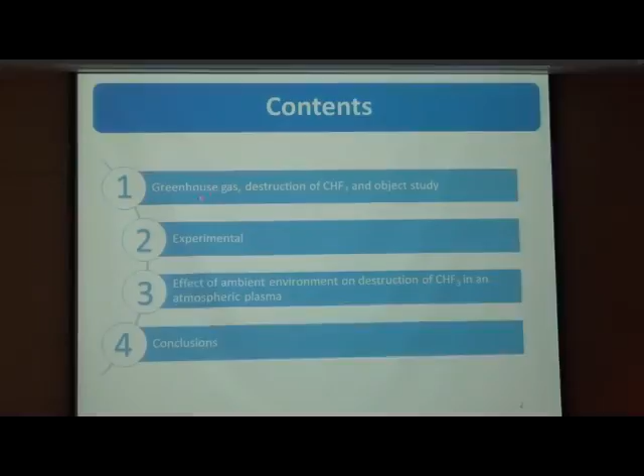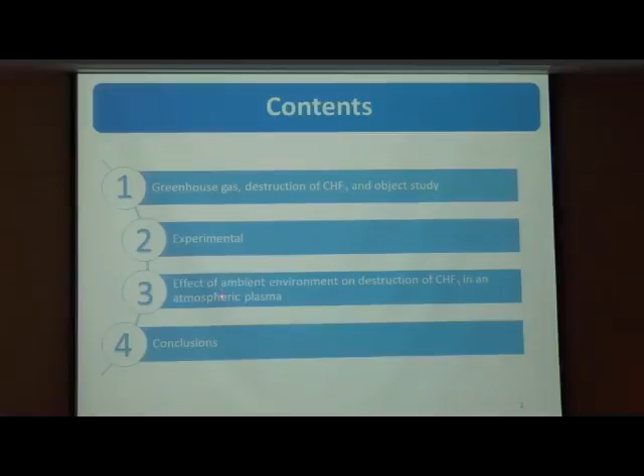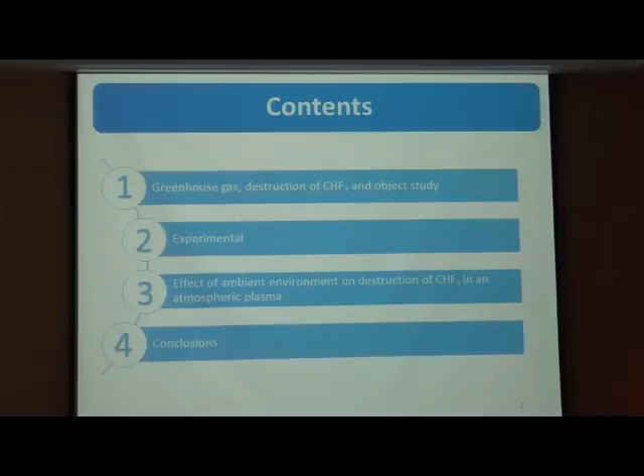PhD candidate at Nguyen National University. Today I am very happy to be here and tell you some interesting data about destruction of CHF3 in an atmospheric plasma system. I would like to cover several sections: first, introduction of greenhouse gas and destruction of CHF3 and the objects of my study; second, I will show the experiment; then I will focus on the effect of ambient environment on the destruction of CHF3 in an atmospheric plasma system; and at the end I will show some conclusions.

Now I am going to session one. Here is a schematic of energy exchange between the sun and Earth's surface and atmosphere. When daylight comes, solar radiation can be absorbed by the surface of Earth and atmosphere, and then Earth's surface emits thermal radiation. In this case, a larger amount of thermal radiation from the surface can be absorbed by the atmosphere. After that, the atmosphere emits thermal infrared radiation back to the Earth's surface and into space.

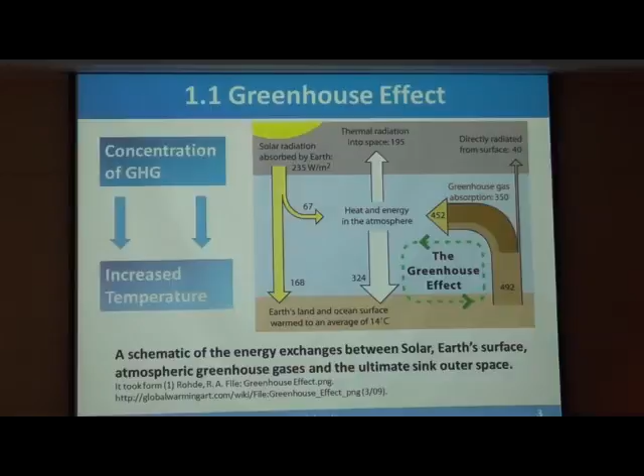Therefore, when the concentration of greenhouse gas increases, the temperature in the world increases. Greenhouse gas is generated from natural processes or human activity, for example decomposition of organic material or burning of fossil fuel, agriculture, and several industrial processes that generate greenhouse gas.

In this figure, the emission of carbon dioxide is increasing while forest area is decreasing, from 1994 to 2014. This presents us the increasing emission of greenhouse gas as a serious situation for the world.

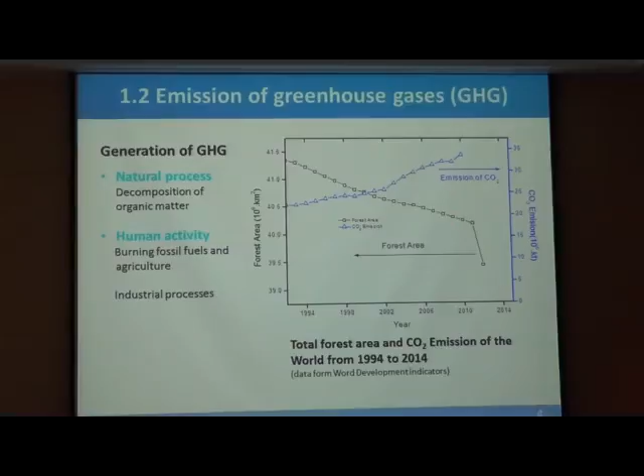This picture shows what kind of industry generates high greenhouse gas and what gas is generated in industry. Here you can see the energy industry contains about 60% of total greenhouse gas in the world, and carbon dioxide is the main greenhouse gas, containing about 80% of total greenhouse gas over the world.

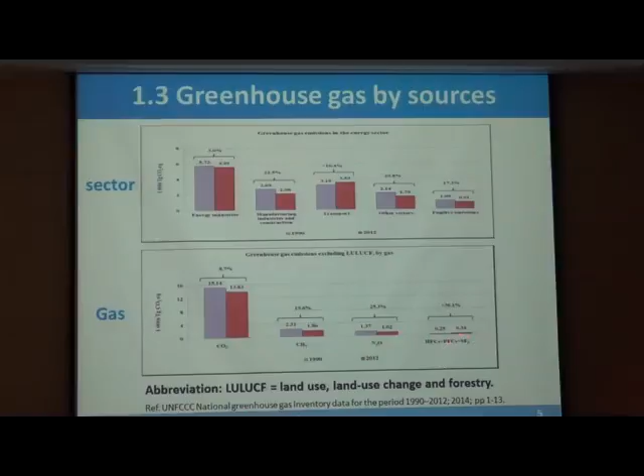Here you can see SF6 and PFC, with SF6 about 6%, but CHF3 is a product during manufacture of HCFC-22. Perfluorocarbon compounds contain about 6% of emission of total greenhouse gas, but global warming potential of CHF3 is higher than carbon dioxide by about 11,700 times, and the lifetime of CHF3 is about 260 years.

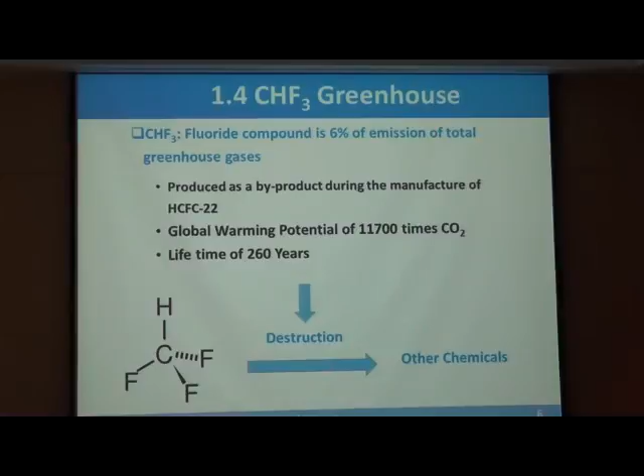So decomposition of CHF3 into other chemicals is very important and interesting for the reduction of greenhouse gas. Today we have thermal oxidation, catalyst methods, and plasma reaction for the decomposition of CHF3.

In thermal oxidation, the operation temperature is high, about 1200 Celsius, and this process requires further treatment of exhaust gas. For example, this process produces HF acid and HCl acid that must be treated. But in this thermal oxidation, there is higher destruction of CHF3.

For catalyst methods, the reaction temperature is lower, about 500 Celsius. But in these catalyst methods, HF acid forms and reacts with the catalyst, so that is the main problem of catalyst methods.

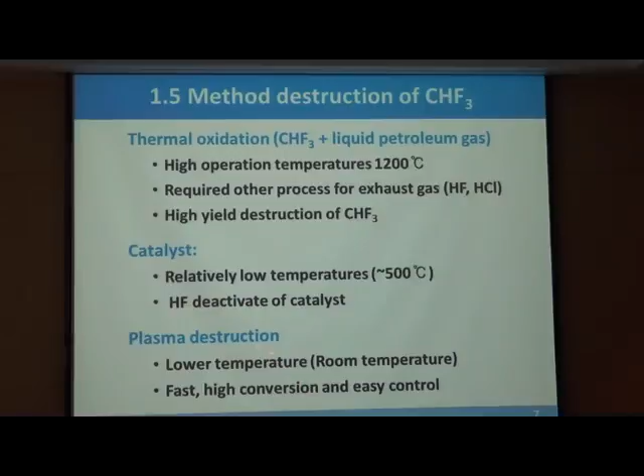Plasma destruction of CHF3 can be performed at low temperature, is fast, has high conversion, and is easy to control. Why can plasma destruction do this easily? Because the key to destruction of CHF3 by plasma is the electron impact reaction.

Here I show several main reactions of electrons with CHF3 in a plasma system. High energy electrons can be generated under an electrical field, which is the reason this can be performed at room temperature, faster, and with easier control of the process.

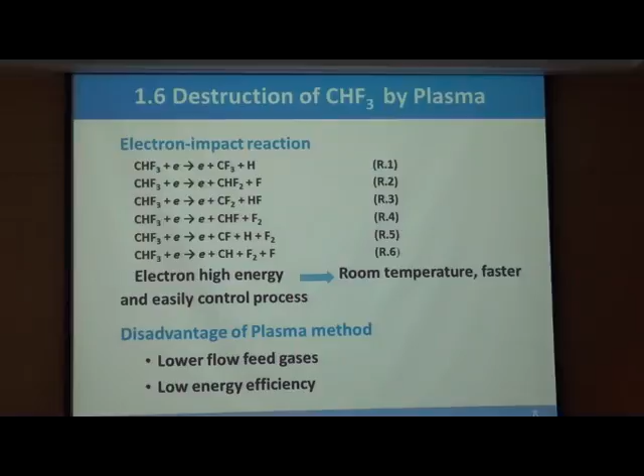However, in the plasma method, there is low flow gas and low energy efficiency. So in my study, I want to improve energy efficiency for reduction of CHF3.

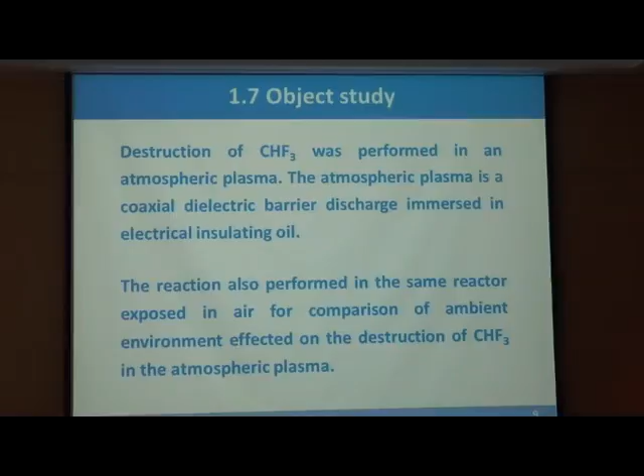Here is the object of my study: destruction of CHF3 performed in an atmospheric plasma. The plasma is a coaxial discharge immersed in electrical insulator oil. The reaction is also performed in the same reactor, but with the reactor exposed to air, for comparison of how the ambient environment affects the destruction of CHF3 in the atmospheric plasma.

Now I want to show what I did. Here is the mixed gas from CHF3, nitrogen, and oxygen, with the ratio of nitrogen to oxygen equal to 79 to 21, introduced into the discharge zone by MFC, a mass flow rate controller. For generation of the electrical field, I used an AP plasma power supply. To record the electric waveform, I used a digital oscilloscope, and for analysis of gas products I used a GC system.

For analysis of optical emission of the plasma, I used an OES system to record the optical emission spectroscopy. The reactor has a discharge gap of about 1 millimeter, and the discharge volume is equal to 10 milliliters.

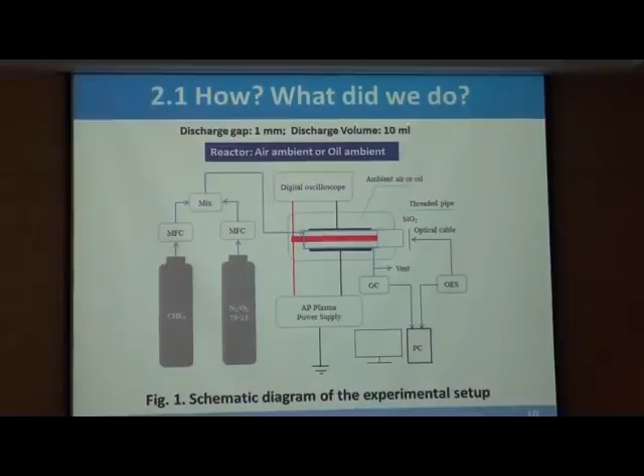To understand my work, you can see the schematic of my experiment. For destruction of CHF3, I perform two cases: the first reactor in air and the second reactor in oil.

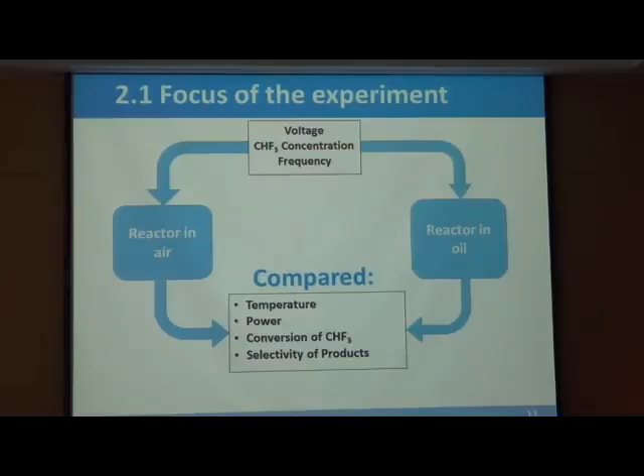Here you can see power and temperature linearly increasing with time of reaction and voltage. However, in this case, with applied voltage of 7 kV in air, this is non-linear because we have a peak at reaction time of 9 minutes.

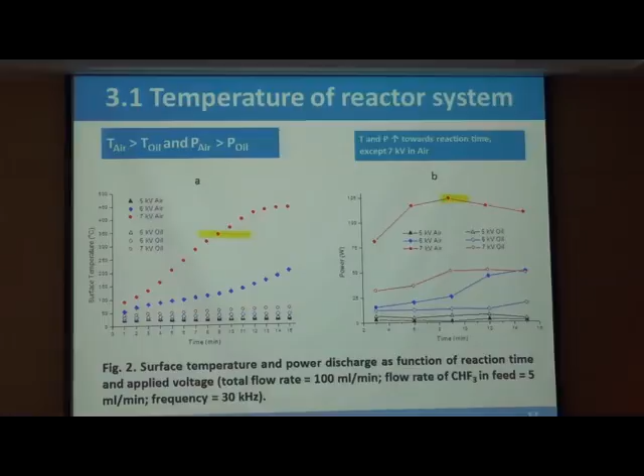And with temperature about 350 Celsius. Here's a question: why at 7 kV do we have a peak at 9 minutes? I would like you to attend to the next slide, which will show the reason for this.

Here in figure A, is a cross view of my reactor. Here I have three layers of dielectrics. The first is the gas gap layer, the second is the small oil or gap, and at the end is the dielectric barrier layer.

Because in the reactor it causes that the capacitance of each layer can be given by this function, and here you can see a layout of the circuit reactor in a series of capacitance. Here is the capacitance of the dielectric barrier,

and for the gap of oil or air, and for the discharge gap, and so that's a series, so the total capacitance can be generated by this function.

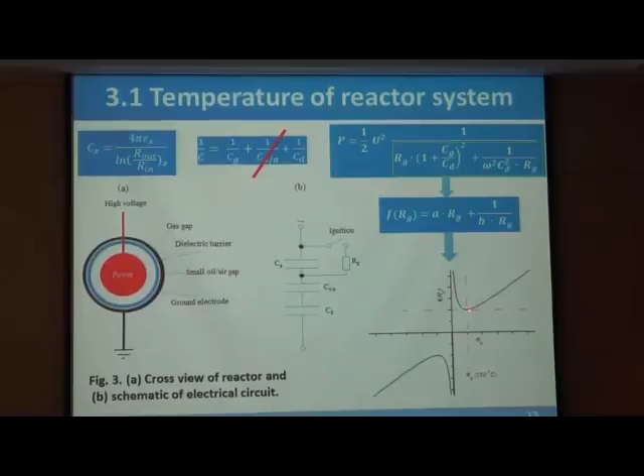according to our experiment, it may obtain a minimum at 350 Celsius. So that's Rg, meaning at this point, and then so the power obtains its highest value at Rg, about 350 Celsius.

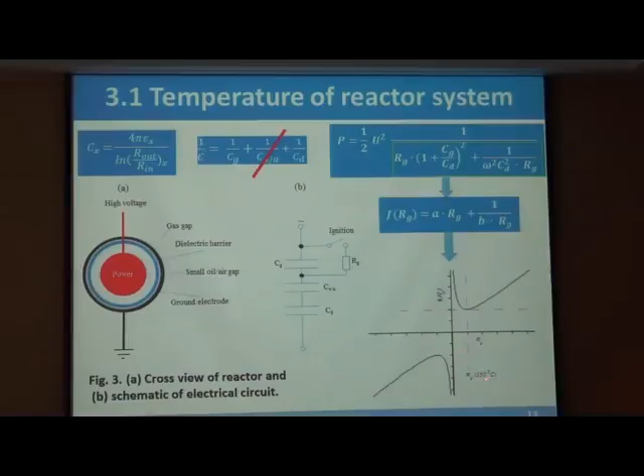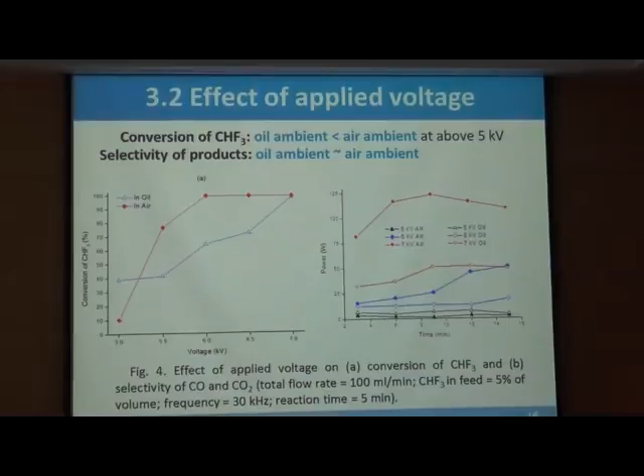However, in this case, when you see 7 kilovolts, the conversion of CHF3 under oil or air is about the same, near 100%, but power in the oil is lower than in the air, which shows that energy efficiency in the oil is higher than in the air.

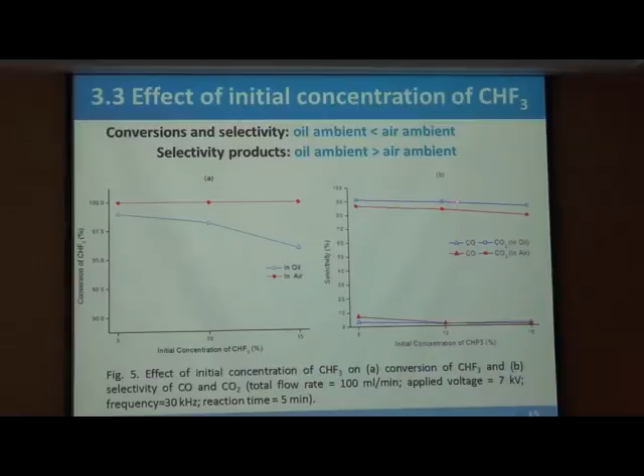For the same trend of CO and carbon dioxide, however, in this case, selectivity of the byproduct carbon dioxide in oil is higher than in air.

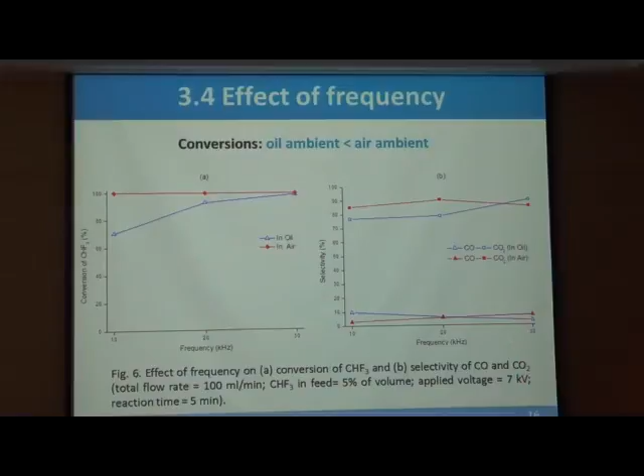For the same results above, at high power, the selectivity of carbon dioxide is higher than oil at the same applied voltage.

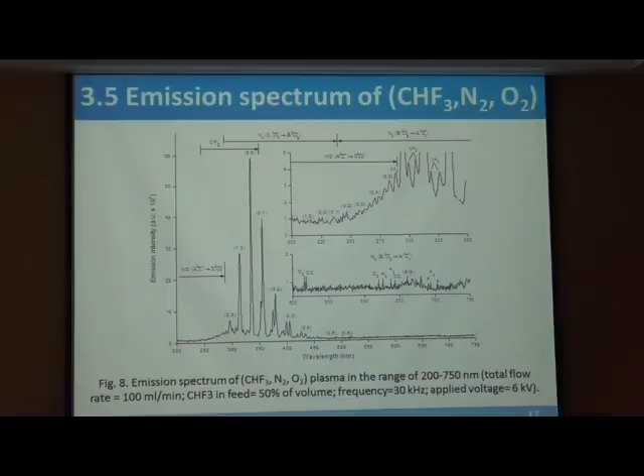This can be helpful for analysis of the mechanism of the plasma reaction. I would like to make several points as follows.

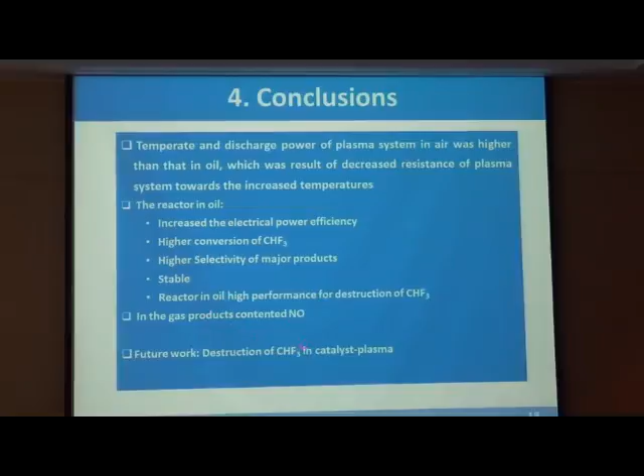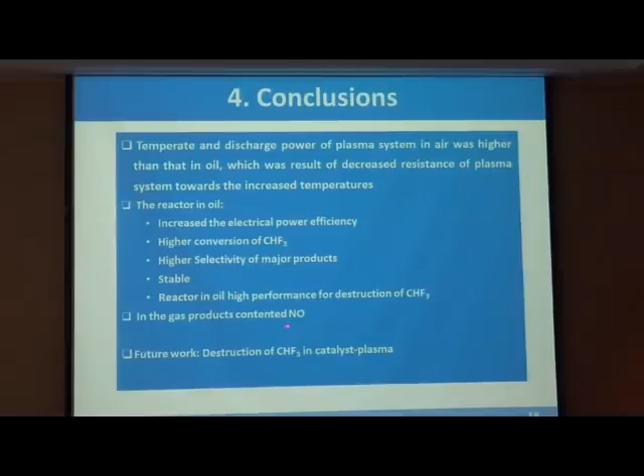However, in our research, the gas product contains NO, so in the future I will consider destruction of CHF3 using catalyst and plasma reaction. We hope to remove nitric oxide from the product.

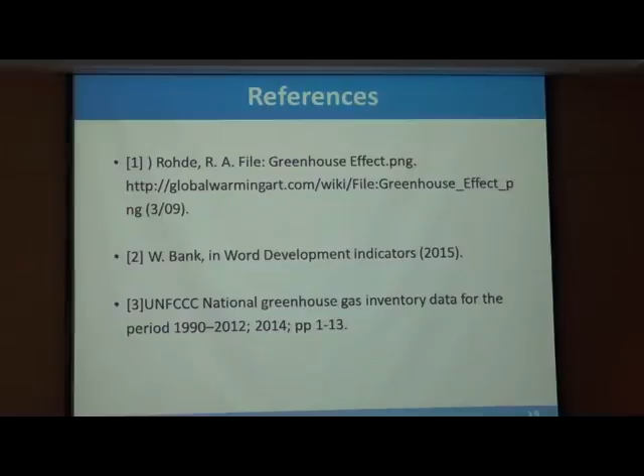My presentation summarizes several data here, and thank you for your attention. I would like to answer any questions if you have them.